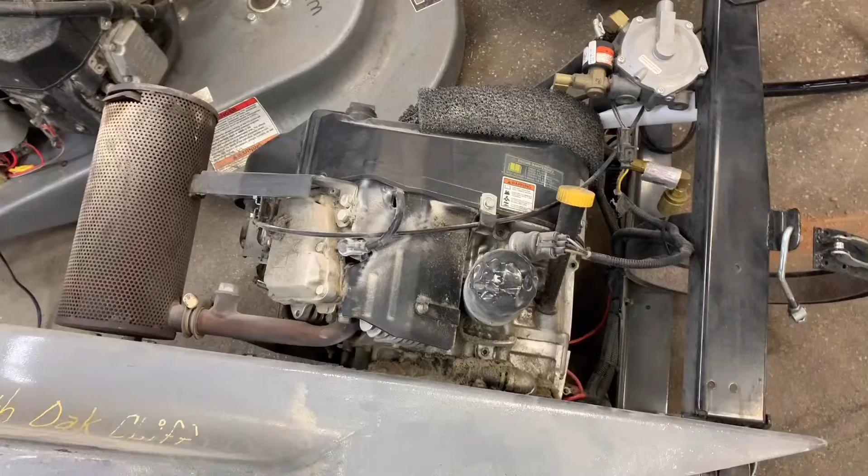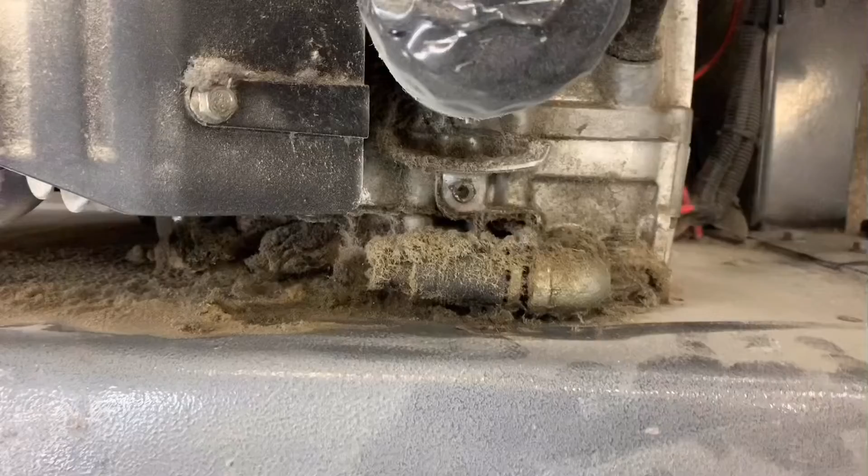Today we're going to talk about one of my biggest pet peeves: these plastic drain valves that leak. Every one of them seeps. They may not physically drip, but these are no good. The plastic ones - I think Kohler puts them on their engines, Kawasaki puts them on their engines. As you can tell, this thing has got a pretty extensive leak. What happens is the little O-ring in there, this thing is made of plastic. These engines get super hot, the plastic expands and the O-ring doesn't seal anymore. Once you change the oil a couple times, it wears that seal out and the whole thing just leaks. Sometimes it'll actually be loose on the engine because of hot and cold cycles, and this plastic fitting expands and contracts so many times that it just leaks like a faucet. Let me show you how to fix it.

Now this is a far superior upgrade to the plastic drain valves. As you can tell, this one is a brass or chrome plated brass drain valve. All you do is it's got a screwdriver slot, you turn it a quarter turn and then you can drain your oil. All you need is a screwdriver to open and close the valve. Pretty nifty - they put these on Grasshopper zero turn mowers.

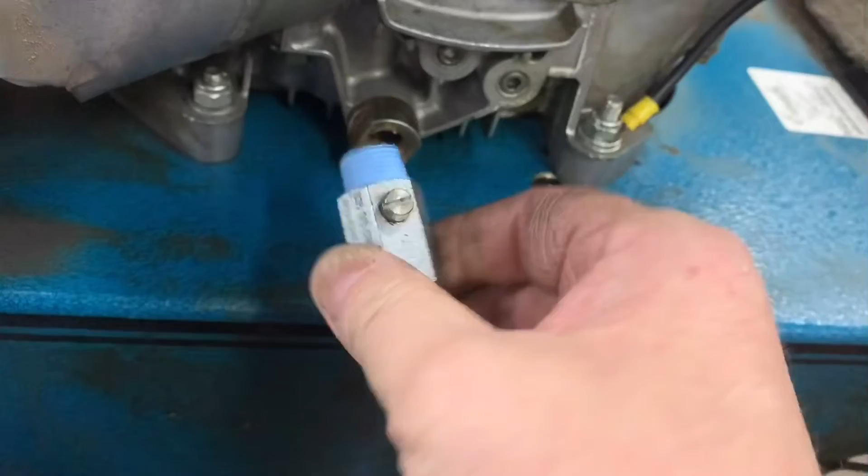Alrighty guys, I've got all my mating surfaces cleaned up, I've got my threads clean. I've got my new valve with the Blue Monster PTFE pipe thread sealant, and we're going to screw it in and just snug this up.

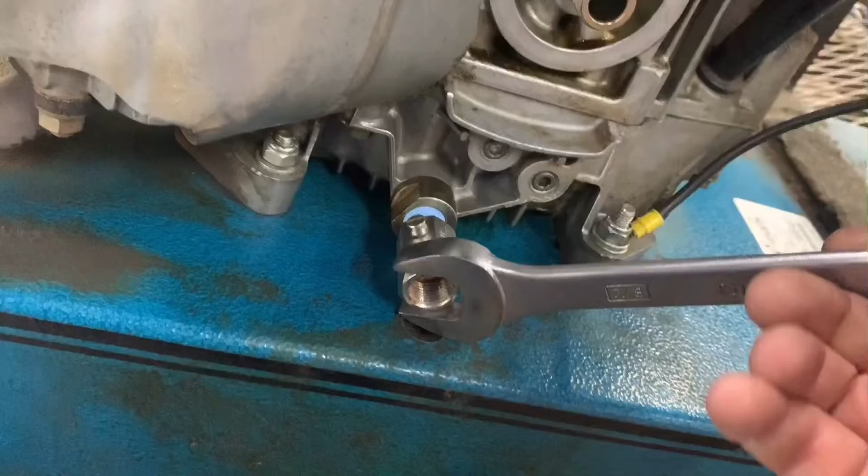You want your actuator screwdriver slot to be perpendicular to the mower deck or the frame of the machine. So just enough tightness - if it's not tight enough and it feels like you need to go another round, do it, but use your own discretion. I think that's tight enough right there.

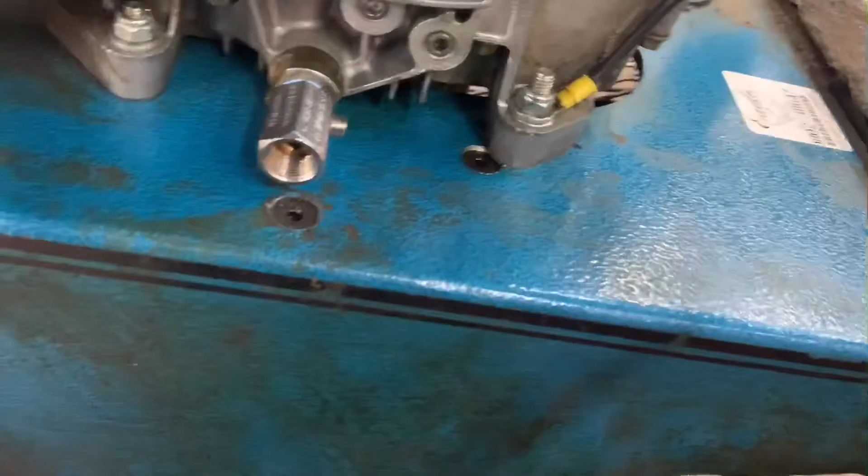We can come in here with a screwdriver and open up that ball valve lickety split. You can actually extend another pipe out here if you don't want to make a mess draining it everywhere, but a lot of people just put some cardboard or whatnot underneath here and drain it out into a bucket. As you can tell, what we do here at the shop is suck it out through the dipstick hole.

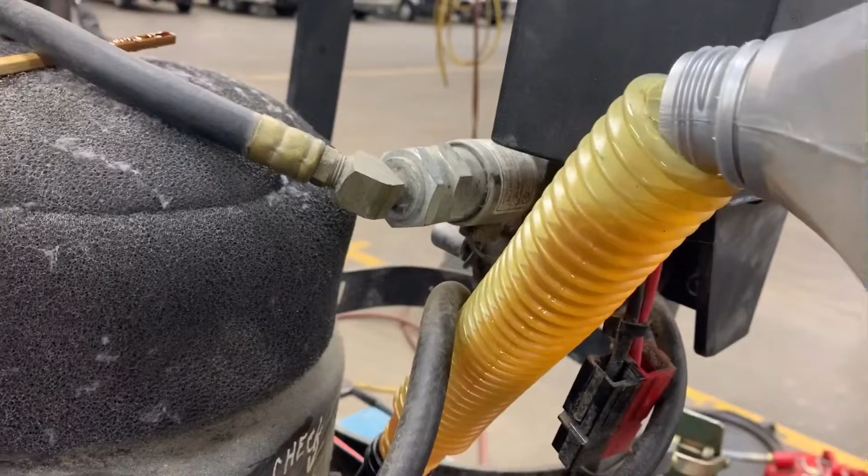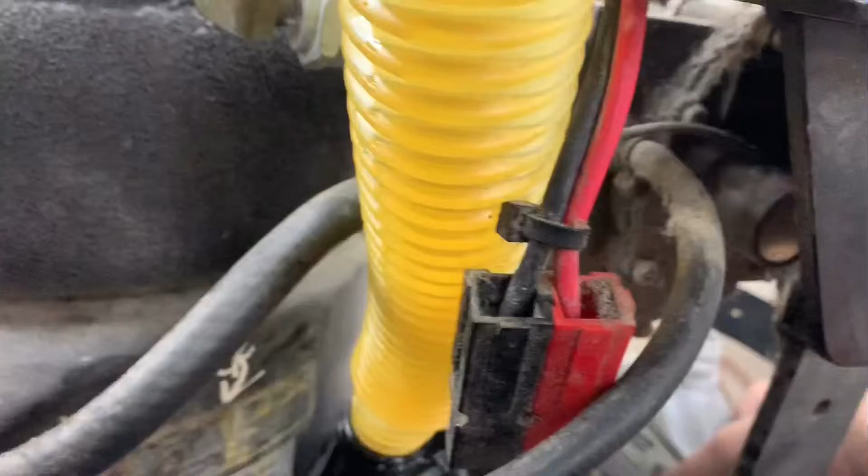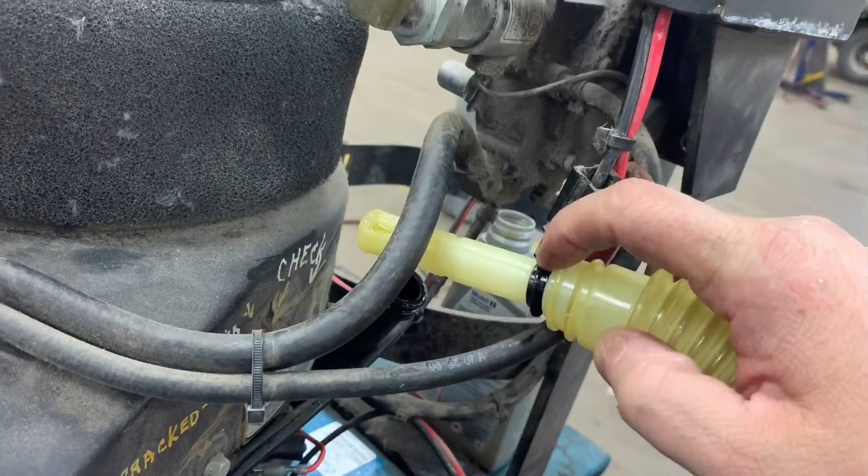Just fill the engine back up with your oil. In case you're wondering where I got this funnel, it's the spout off the DEF fluid from Ford. So Ford DEF fluid funnel is awesome for filling small engines. Ain't that slick? It's got a snout that sticks down in there, and this little O-ring actually fits the neck perfectly and snaps down in there. It couldn't be no better.

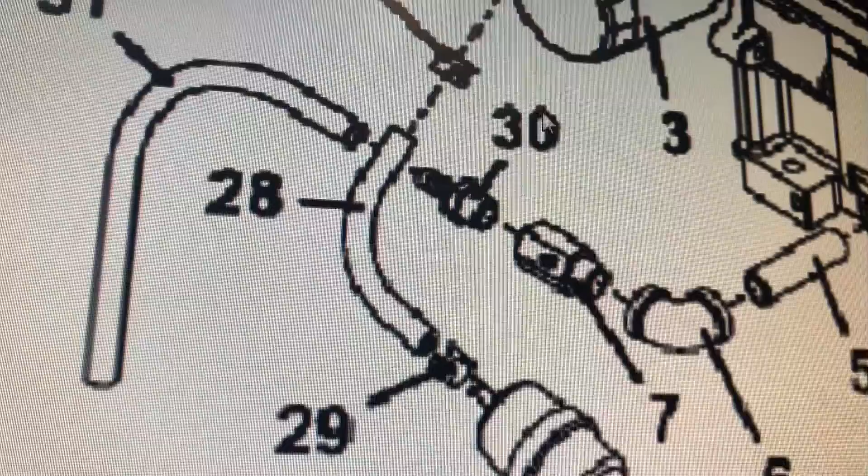Alrighty guys, here's the drain valve, number 7, and I'll give you a part number. If you want, you could order number 30, which is a 1/2 inch MPT with a hose barb, so you can drain it into a suitable container, or number 31, but I would just use fuel line. I wouldn't order this hose from Grasshopper - it's like 20 bucks, it's ridiculous.

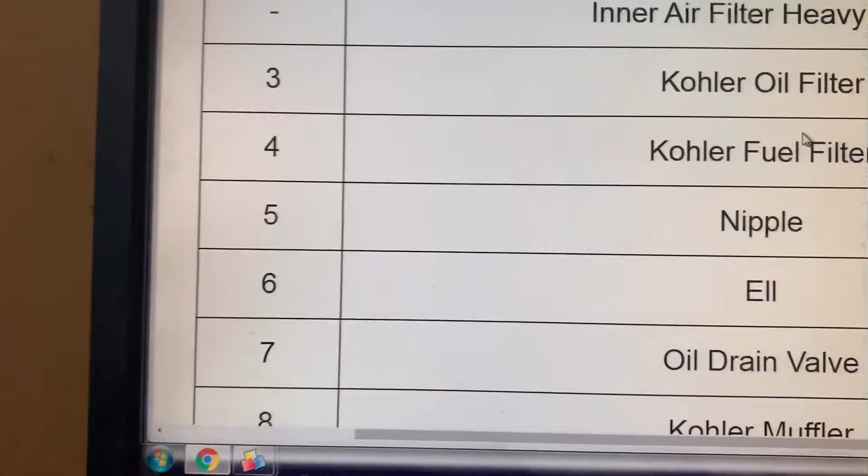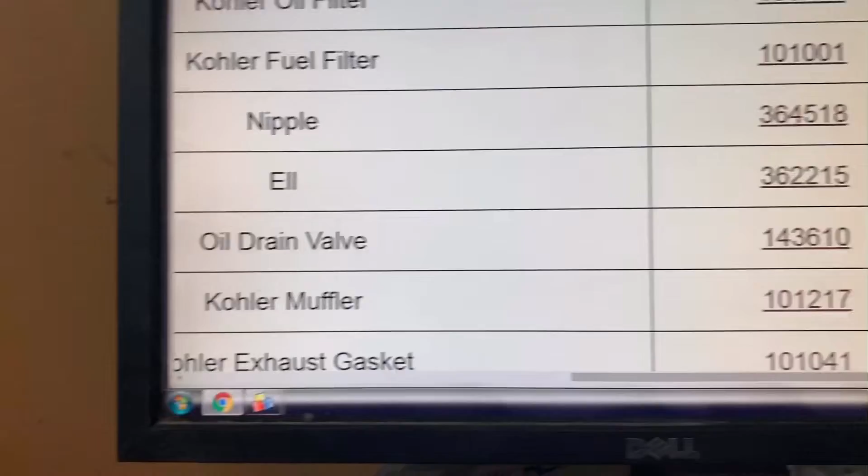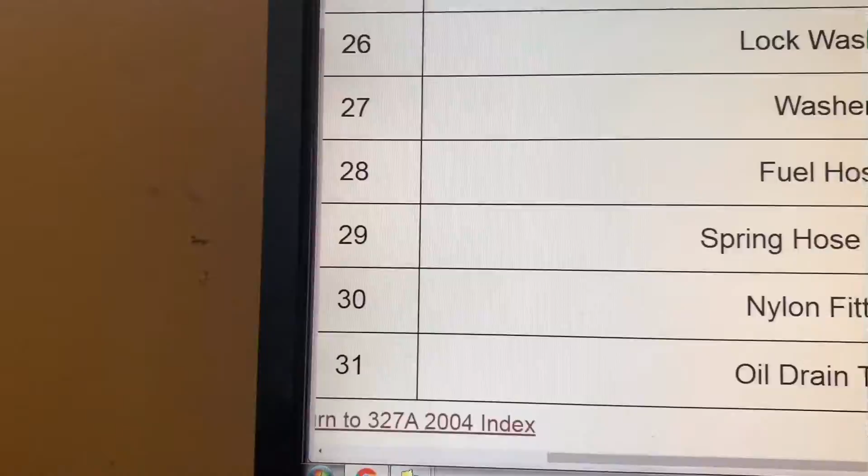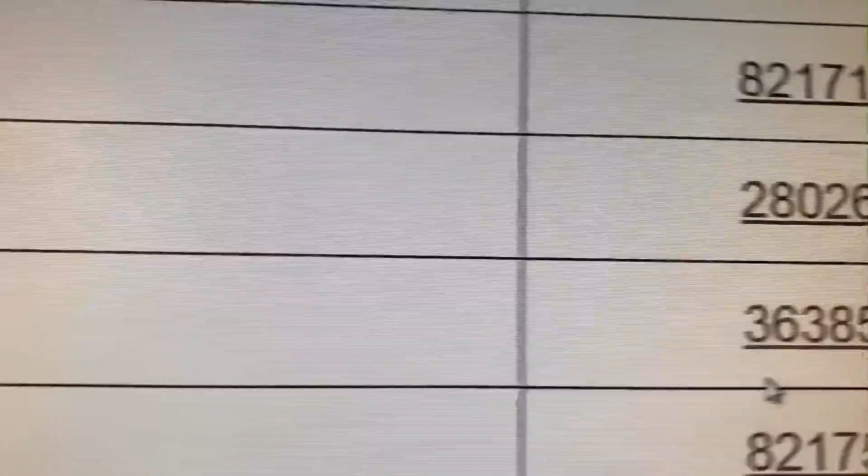So let's just scroll down to number 7, the oil drain valve. Part number is 143610, and if you want the nipple, number 30, they just call it a nylon fitting. You can probably get all these parts at Home Depot, but that part number is 363854 for the hose nipple.

Alrighty guys, we got the hose barb and we got the drain valve fixed on the Kohler engine by using some Grasshopper parts. Pretty neat. And we'll catch you guys on the next one.